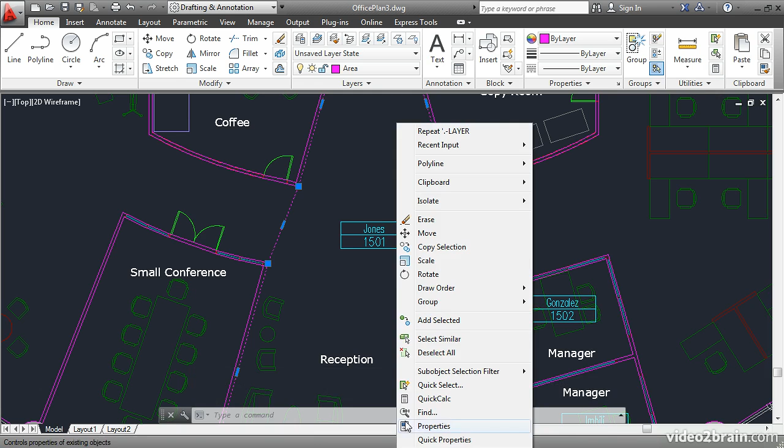In order to access room areas, I have already created closed polylines in each room. These are on the area layer. Turn on the area layer to see what I'm talking about. Click right here to select the polyline which defines the shape of reception. Right-click and choose Properties. You can see right down here that this polyline has an area property which lists its area in square inches by default. We will access this data in a field. Close the Properties palette and press Escape to deselect.

Zoom in on the Room tag. We'll place a field right underneath it. Open the text flyout and choose Single Line Text. You can create fields wherever you have text. Choose the Justify option and then choose MC for middle center. Turn on Object Snap and Object Snap Tracking on the status bar if they're not on already. Hover the cursor over this midpoint and track down vertically and click a point right about here. Accept the default text height of 10 inches and the rotation angle of 0 by pressing Enter, Enter.

And then instead of typing, right-click and choose Insert Field from this context menu. Here we have a list of fields which are part of AutoCAD's drawing database. Scroll down and select Object. Then click this button to select the object. Click on this polyline right here to get the reception polyline. Right now it lists a value up here in the preview, which is the number of square inches in this closed polyline.

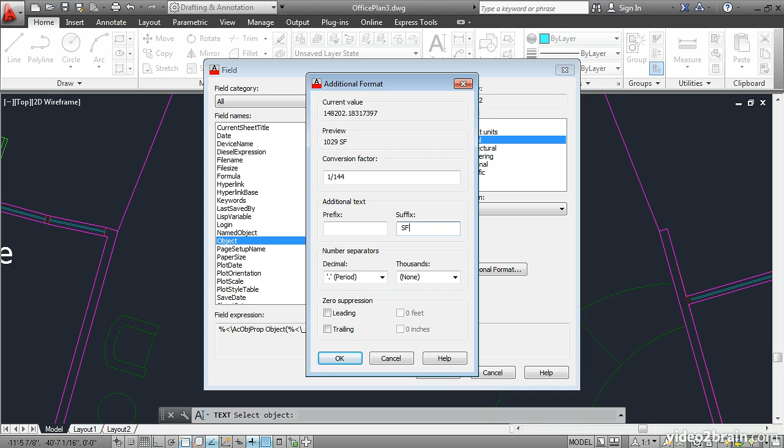Now I'd like to display this in square feet instead, so click Additional Format. Here you can input a conversion factor. And let's just think this through. There are 12 inches in a foot, so a square foot would have 12 times 12 inches, which would be 144 inches. So to convert from square inches to square feet, we need to divide 1 over 144. It shows you this number of square feet. However, it doesn't tell you it's square feet, it just gives you a number. Click in the suffix text box and type space capital SF for square feet. Then click OK and OK again.

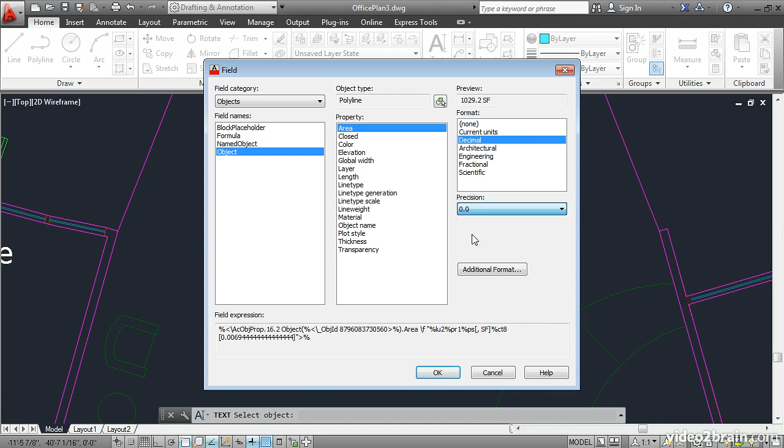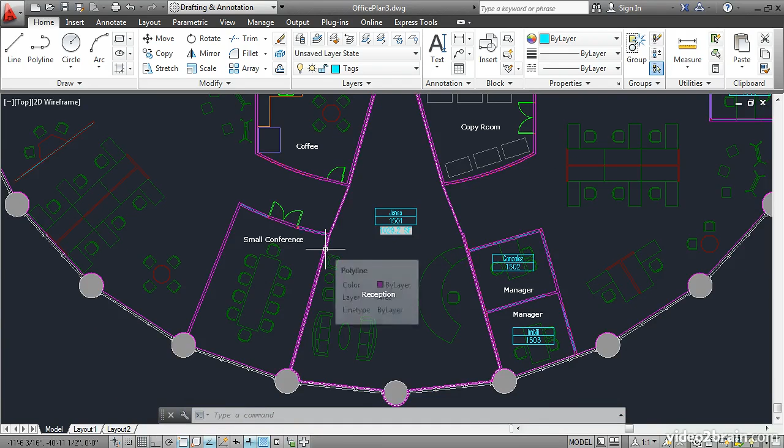This is a field. It's identified by a gray background color, which doesn't plot. If you want to edit the field, you can double-click on it, and it brings you right back to the field dialog box. Let's say we want to change the precision to have 0.0. Okay? And now we have a little bit more precision in the area listed on the drawing. I'll press Enter, Enter to complete the text command. I'll just zoom out and let's take a look at that. So this is the polyline representing the shape of reception. And right now it says it's 1029.2 square feet.

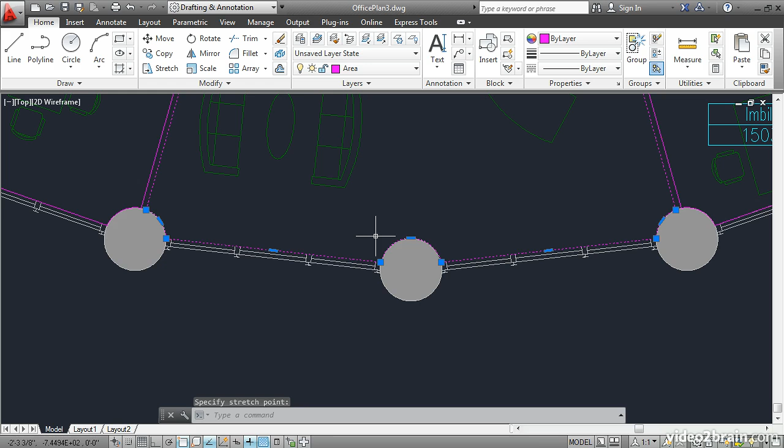If you notice down here, this polyline encompasses this shell column, and that's not correct. Click this grip and change the way that the arc curves into the inside and snap to perpendicular. And then press Escape. Pan up here, and you'll see that the area remained the same. The reason for that is the drawing needs to be regenerated for the fields to be recalculated. So type REGEN for regen and press Enter. Now we get a new square foot value. This is taken right from AutoCAD's drawing database where the object properties are stored.

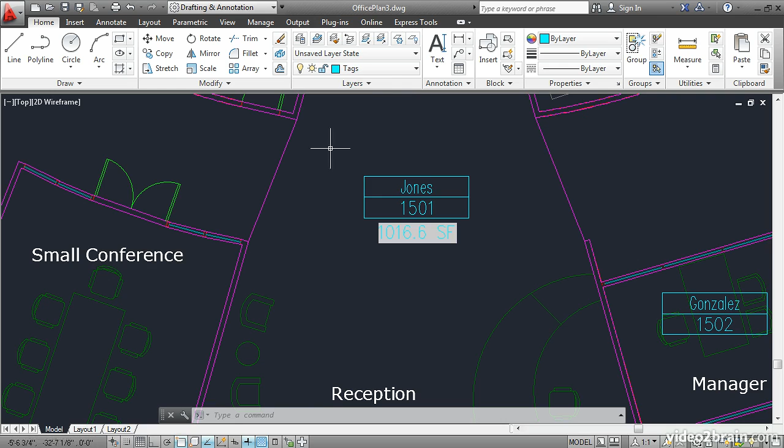We can turn off the area layer because the object properties still exist, whether or not that particular layer is displayed. And we still have an accurate area value for this particular space. So you've learned how to create fields within single-line text and how to format the field to display relevant information. You have also seen how a field is automatically updated after drawing regeneration.